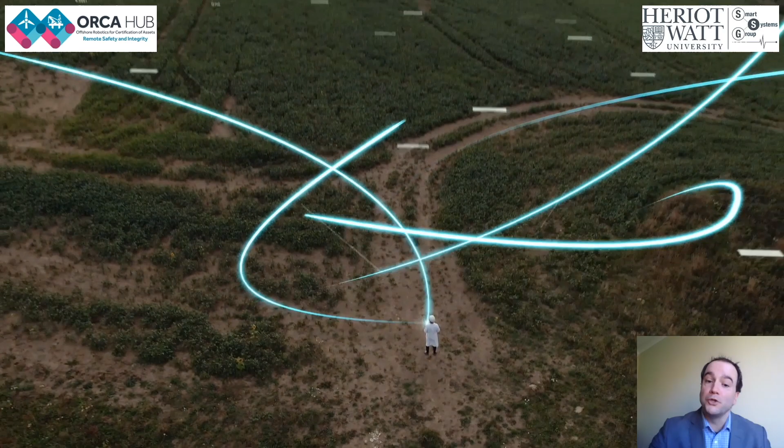So the offshore environment is where our focus has been in the ORCA project. This is a very dynamic and complex environment where there is a lot of legacy infrastructure, as well as increasingly expanding offshore renewable infrastructure. At the same time, as we go through this unprecedented growth, we have an opportunity to capitalize on the unprecedented levels of connectivity we have through cyber physical networks.

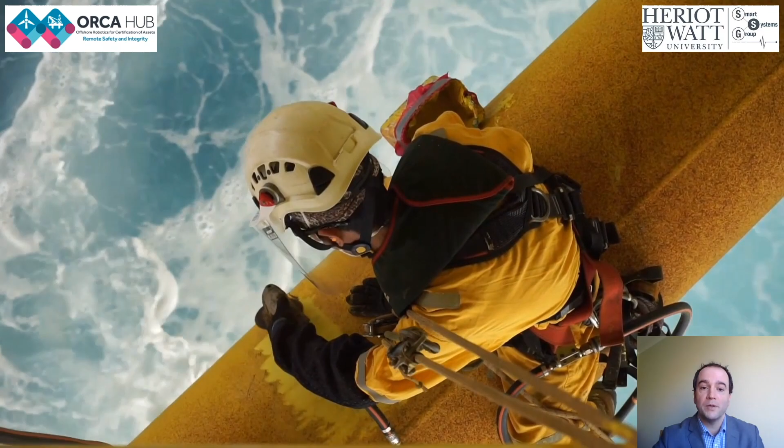Now, the life cycle management of our critical energy infrastructure is key. And because we can now engage from generation, distribution to point of use, as you're seeing here, at global scales like never before, we have some amazing tools and technologies at our disposal that can help us deliver sustainability and make human operations in these environments safer and more rewarding.

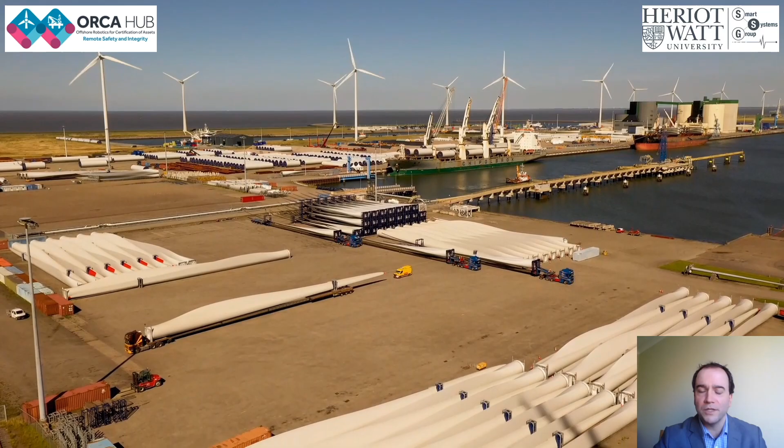The points of intervention that we focus on are predominantly in the operation and maintenance space. However, without a doubt, there are points for robotic and AI solutions at all points of the life cycle of these critical and remotely located infrastructure. So...

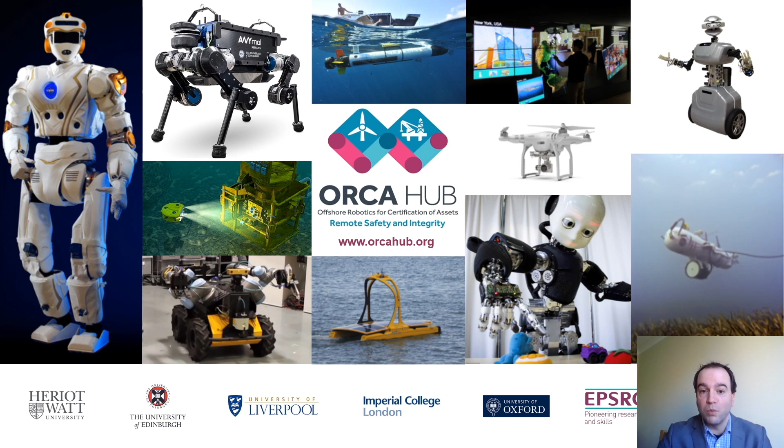So today I want to give you an insight to some of the collaborative work we've been doing across the university partners of Heriot-Watt, University of Edinburgh, University of Liverpool, Imperial College London and Oxford, along with around 45 industrial partners and stakeholders through the Orca Hub.

The Orca Hub is the world's largest robotics and AI research hub solely focused on offshore asset integrity. The vision of the hub is to support long-term offshore industry vision of a semi-autonomous energy field, operated, inspected and maintained from shore. So our mission is to drive this creative science and engineering into next generation products and solutions, and to support the UK supply chain in becoming one of the most productive in the world.

Within Orca, we have 4 work packages, or research themes, you could define them as. When we created these themes, it was after workshops with industry to understand the key capability statements they wanted us to achieve for their industry.

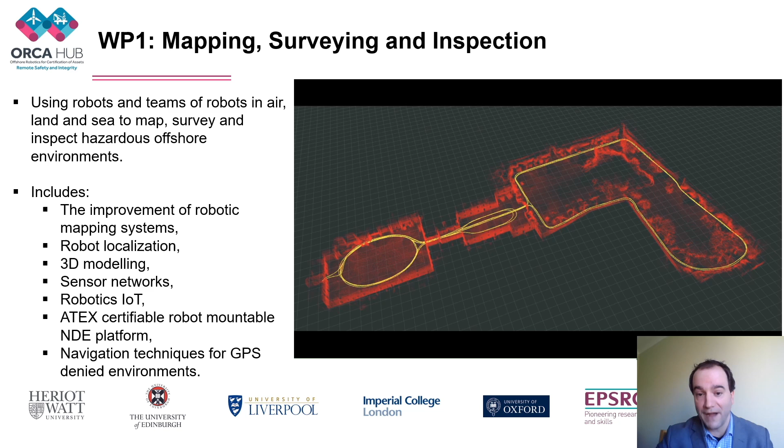Mapping, surveying and inspection, of course, having an accurate and computationally efficient picture of the world around us is clearly key to safe and productive interaction with it. This is just one example from our teams, and we are looking at land, sea and air robotics, looking to improve mapping systems and localization, very important when we consider the dynamics of the environment in terms of visibility, etc., and how we build up these robust and accurate maps of the environment using different multimodal technologies.

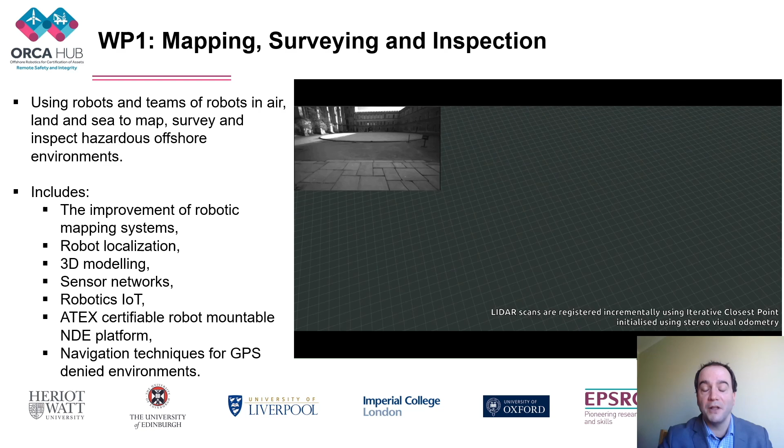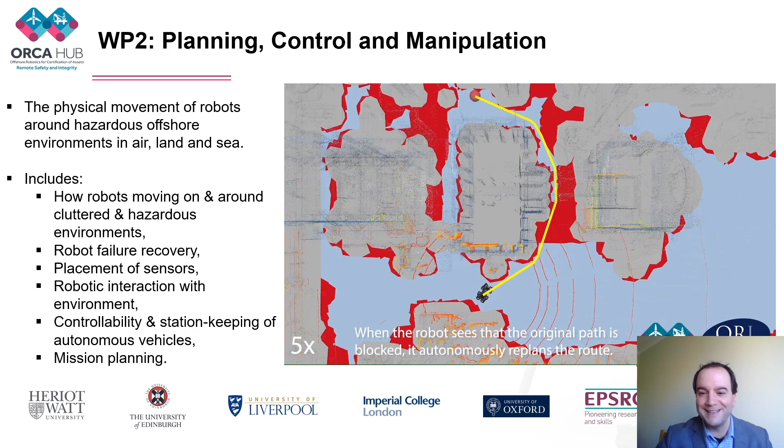Another example, in this instance from planning, control and manipulation, our second work package, concerned with the physical movements of robots in these high consequence and intrinsically complex environments, very cluttered spaces not being designed with robot accessibility in mind. In this instance, what you're seeing is the adaptive planning and control required to both mitigate the risk and take an alternative route, then overcome obstacles encountered on that new pathway.

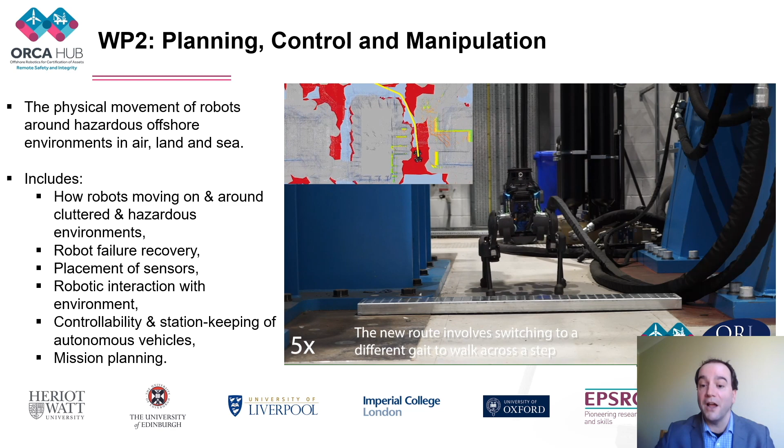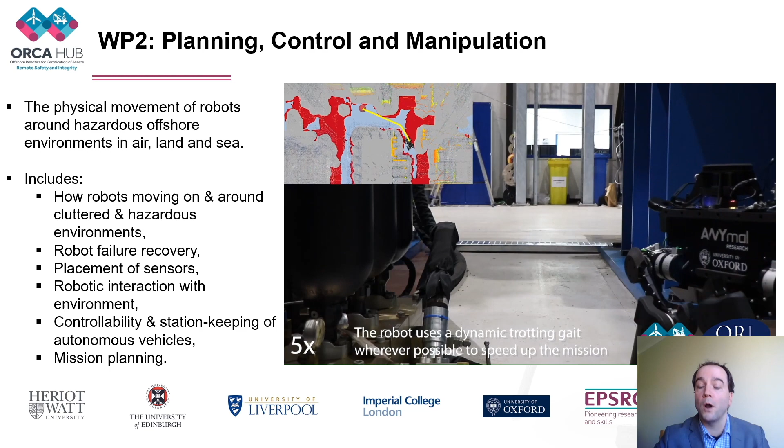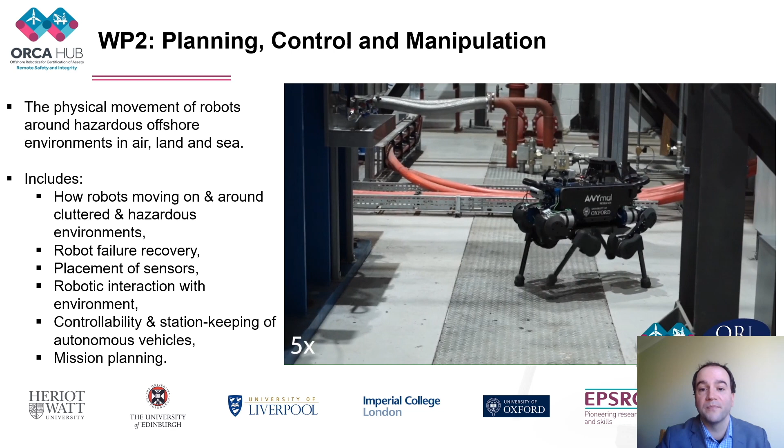Robot interaction with the environment is obviously incredibly important for inspection, but clearly also for manipulation tasks. This could be to add a stimulus to test a structure, or indeed to conduct a repair function. As we can see here, ANYmal has located the asset of interest, and it can then conduct the inspection with the payload, in this instance a thermal camera.

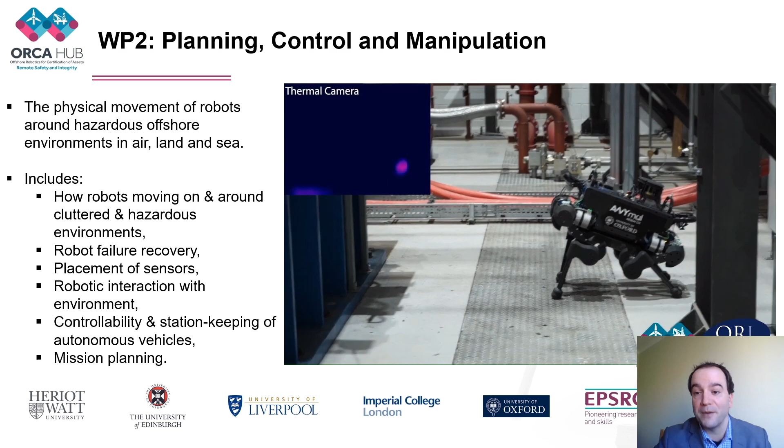Our third work package was looking at how we couple and optimize human collaboration with multi-robot teams. This was intelligent human-robot interaction with explainable AI. Playing in the background here is the Miriam platform, which can use text and speech to engage and query, in this instance, a fleet of 8 autonomous underwater vehicles. This gives us actionable information for the human in the loop, and the explainability of asking the team of AUVs, as well as individual systems, critical requests such as: what is your state of health?

Why is there a time delay on your arrival at the agreed waypoint? It promotes this translation, engaging and coupling in a kind of symbiotic fashion between the remote human in the loop and the deployed field robotic systems. Obviously this would need to be tailored for a range of end users, from technicians to asset directors, because how we engage, the symbolism and the priorities we apply, will vary for the individuals.

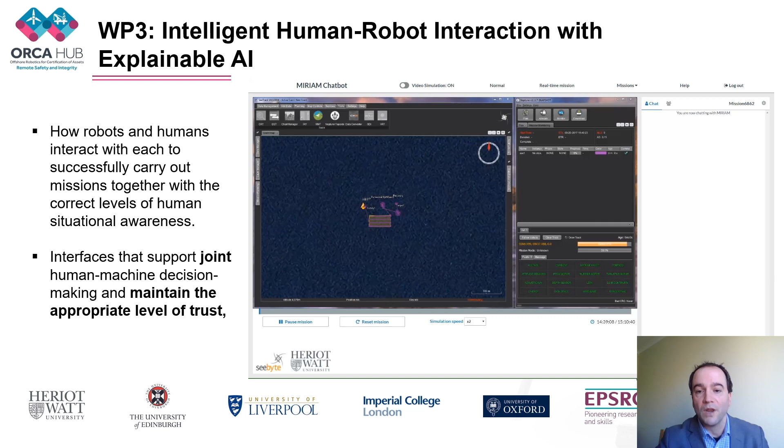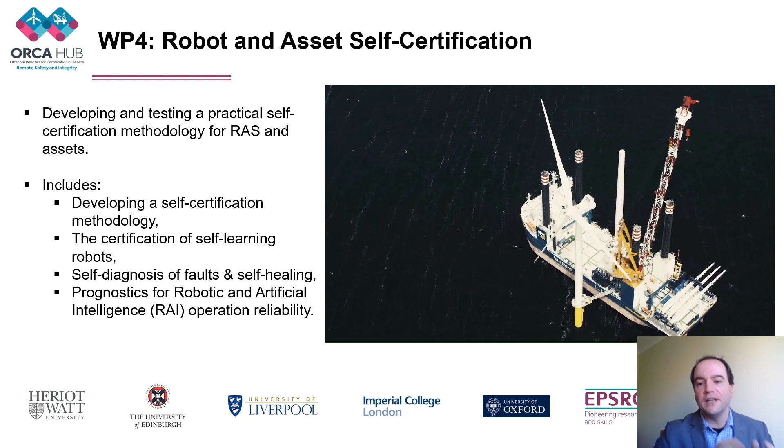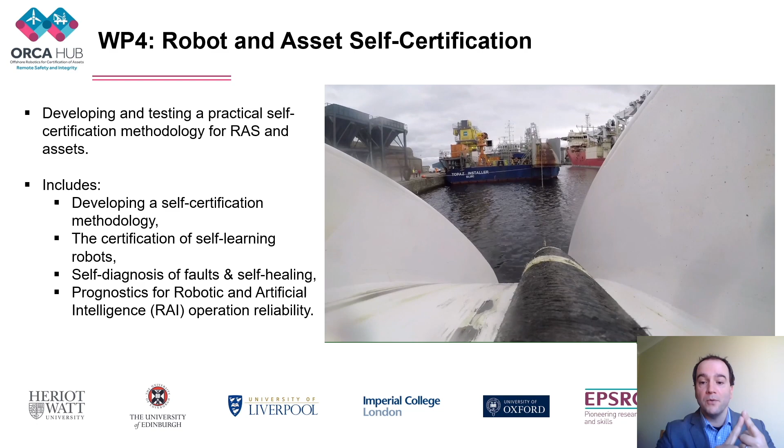Our fourth work package was focused on robot and asset certification. To explain what that means, the laptops you're using just now, your mobile phones, they all have certification that says they're legal to be used. That legal definition has been based on safety and quality compliance. Now, given that robots can have different levels of autonomy, so devolved responsibility, interacting with people, other robotic systems, infrastructure and the environment, we felt a new standard was required.

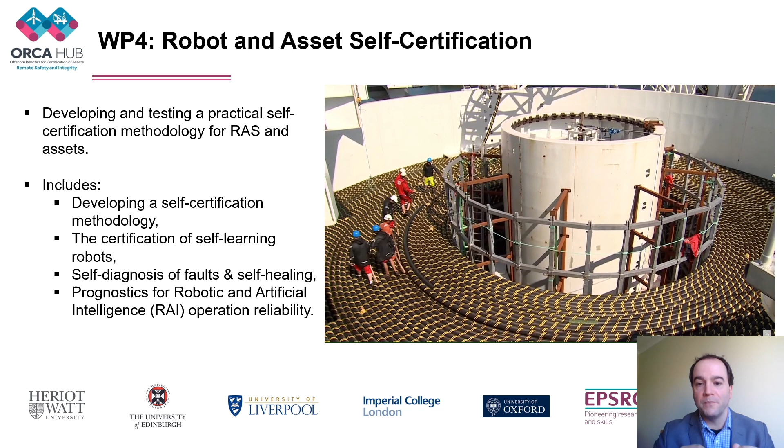And we called this standard self-certification. How could we get runtime diagnostics and prognostics that reaffirmed the robotic platform was still in a safe state of health in order to fulfill its mission? So we developed concepts such as reliability ontologies and edge prognostics, to give us a proper, more informed understanding of the state of health and remaining useful life of these field robotic systems.

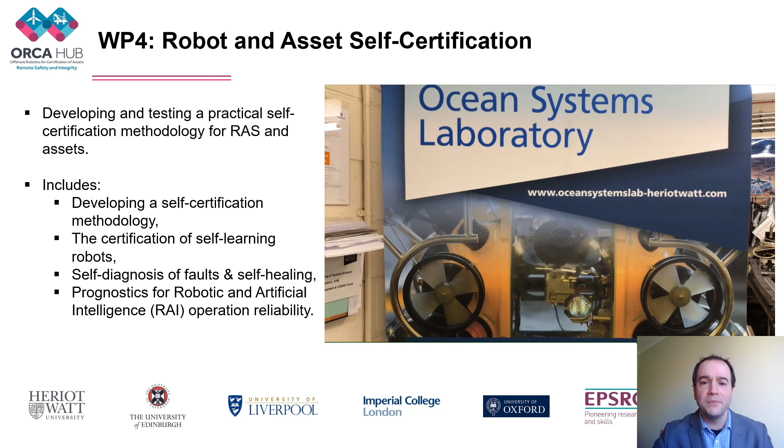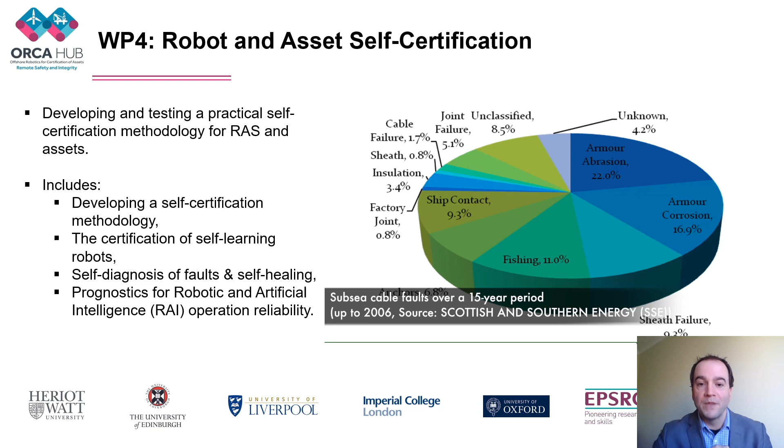Now, we took the principles of that process, that methodology, and also applied it to subsea power cables, because we had discovered, by looking at 15-plus years of historical logs from one of the UK's largest subsea cable asset owners, that 70% of the failure modes of these cables were not being monitored. These failure modes were associated with ambient factors - basically abrasion, corrosion, and third-party impact. And those mechanisms of failure were not being detected by the current state of the art of online partial discharge monitoring, which is predominantly looking at electrical condition monitoring.

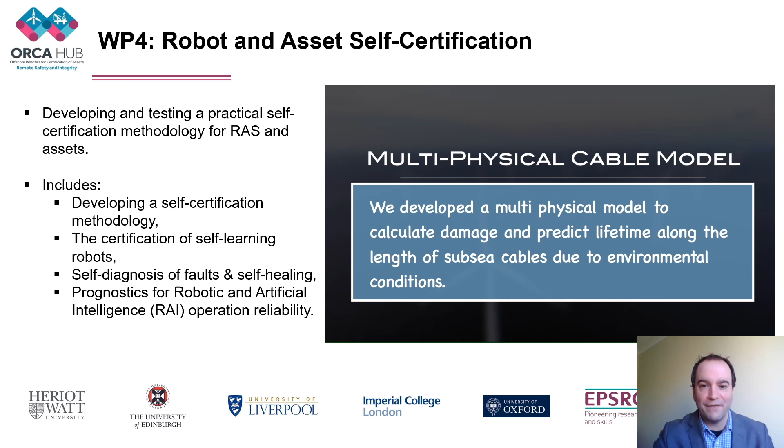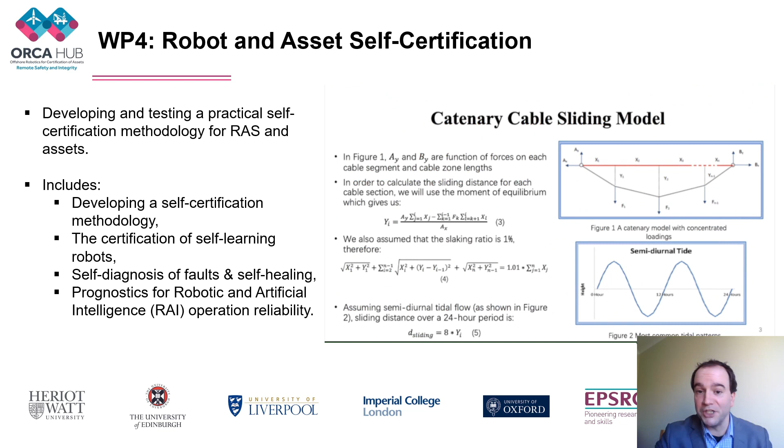And given the amount of legacy cables we have out there, the likes of fiber optic technologies was obviously not an option. So what we created was a low frequency wideband sonar, taking inspiration from the likes of dolphin sonar. This would give us an integrity image of the subsea cable structure.

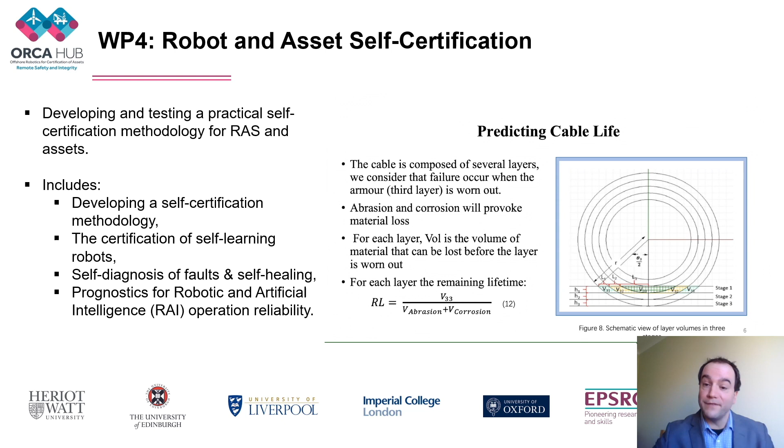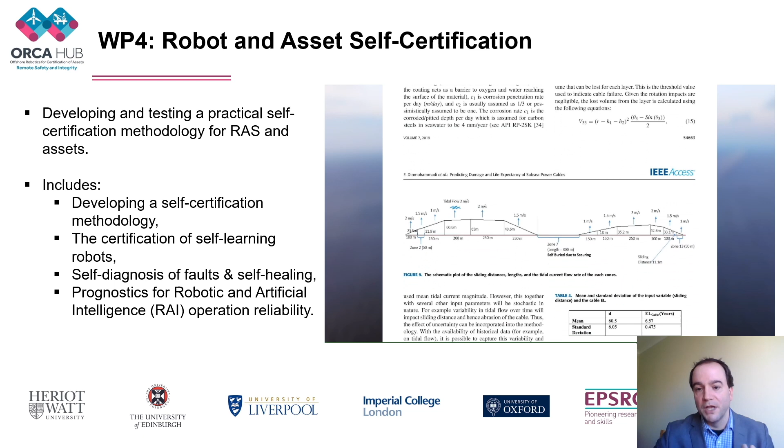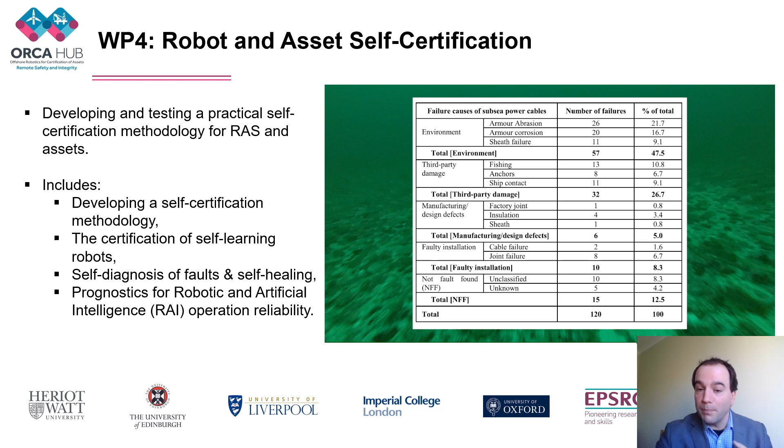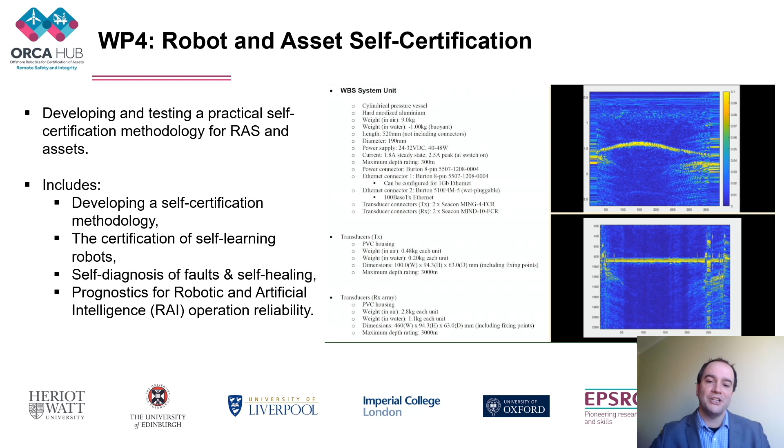Now, to create a really informed and verifiable model, we took sources of data and information from multiple sources, and we created what we call fusion prognostics. So we took historical offline data, in situ seabed topography information, cable manufacturer information. We were then coupling this with some experimental life cycle testing data to understand how these structures may degrade for different cable types over time, and we were able to integrate this to give us, as you've seen briefly, an acoustics and color kind of image.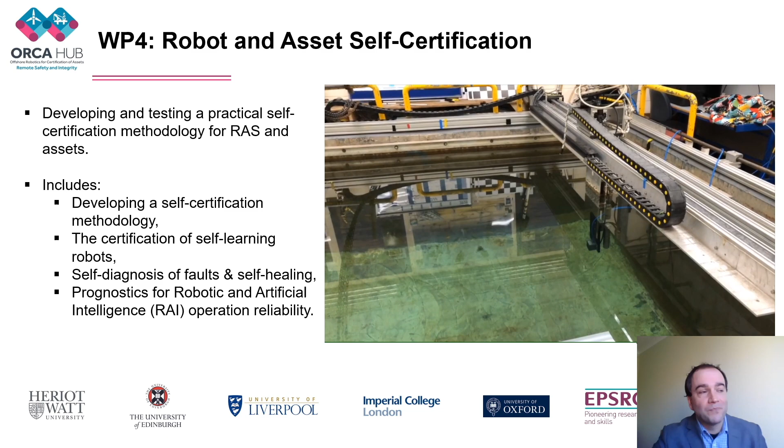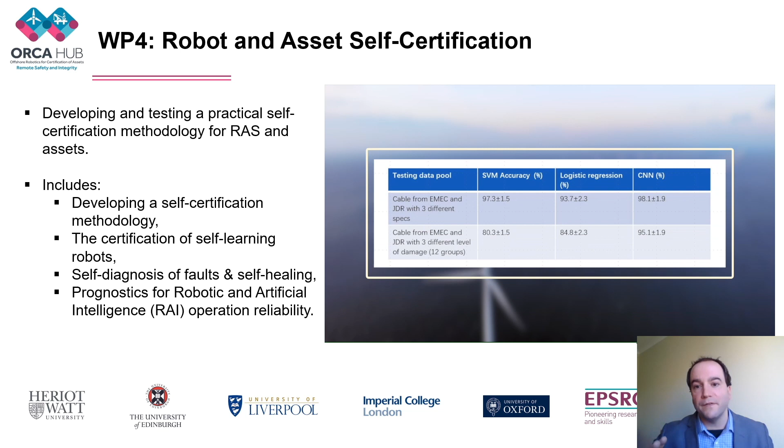The end result of this work was that we were able to forecast the failure of cables within plus or minus 1 to 2 months of their lifespan. And their lifespan, for some installations, was about 50 years. For other installations, you could be looking as short as 2 to 3 years in highly dynamic environments. But more typically, you're looking at 15 to 20 years.

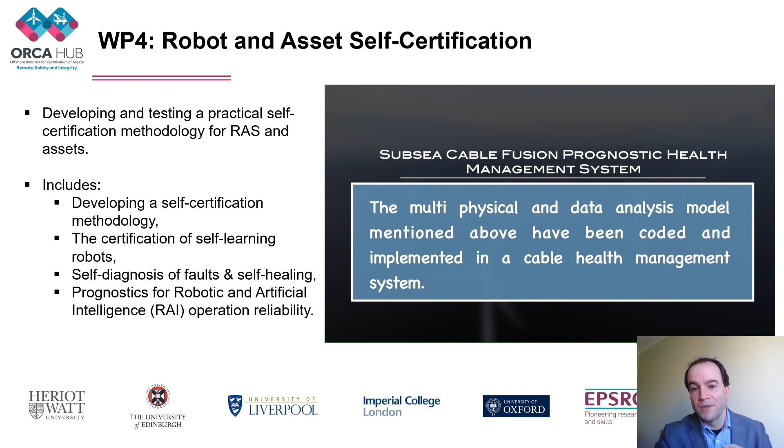Now, that level of accuracy was actually excellent because to operate offshore, you need to mobilize your logistics and your materials about a year in advance in order to reduce your operation and maintenance costs. Okay, so I want to move on now to...

Looking at, so what does the future look like? We've done a lot of short mission case study work in this area, and building on that point I was expressing to you about cyber physical systems, I believe we now have a lot of the enabling technologies to look at more sustainable operations in order to improve life cycle asset management in the offshore space.

And before I give you an insight to our most recent work, I felt it was really interesting to highlight this slide on managing expectations and delivering value when we think of autonomy and autonomy as a service. So Toyota, fantastic company, great resources, great technology.

There was an incident at the Paralympics. It transpired it was human error, but it did cause a disruption to the use of the e-Palette system.

If we then take an example of Amazon, they are struggling to deliver through years and years of investment into their drone delivery system. Again, great company, fantastic resources, great technology, but they're struggling to deliver this service.

Also, Tesla, a household name, their successes and failures in their automotive autonomy is well documented in the media, with a range of factors associated with it, from intrinsic system failures to human failures in terms of misunderstanding of the responsibilities or neglect of responsibilities.

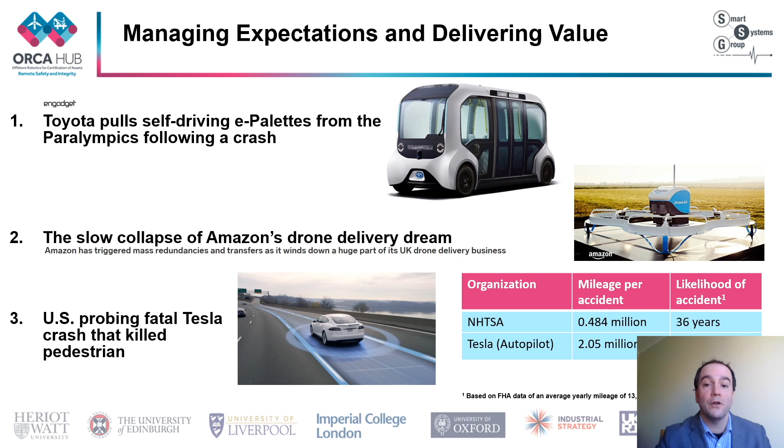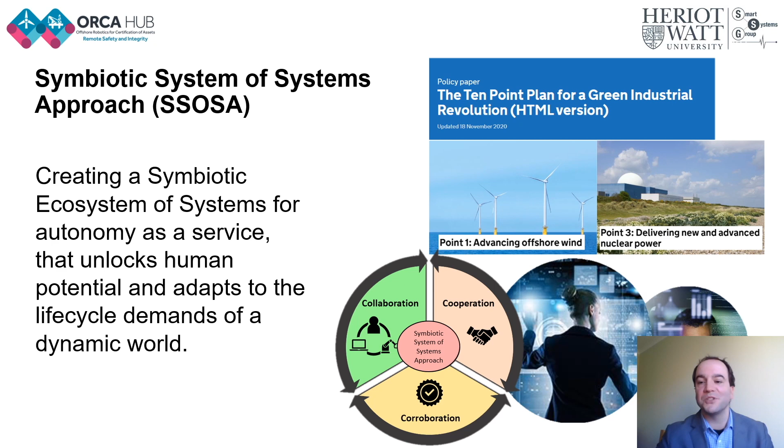So this has driven my group's thinking on a symbiotic system of systems approach. How can we create collaboration, cooperation and corroboration across the environment, the autonomous systems, the human in the loop and the infrastructure? So to achieve that, we need a cyber physical network that allows the leveraging of the benefits and the attributes of each of these systems to co-inform and advance each other.

So a kind of schematic of what this looks like moving forward. We have created what is called a symbiotic digital ecosystem. We can currently, in our labs, incorporate around 1,000 different devices and autonomous platforms into one digital commons and coordinate them with a human in the loop.

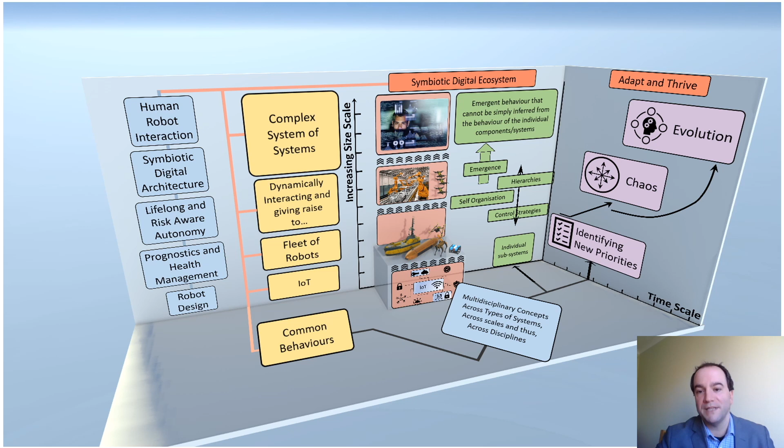Looking into the future on the right-hand side, where I've labeled it Adapt and Thrive, I believe this increased connectivity will allow us not only to be robust to disruption, but actually explore adapt and thrive opportunities. For example, if we see supply chain constraints on composite material availability, we know to instigate an appropriate response in asset life extension to mitigate some of the risks that may create.

So today, to prove some of our principles of this, we have run some experiments in constrained environments, and the deployed technologies look like this.

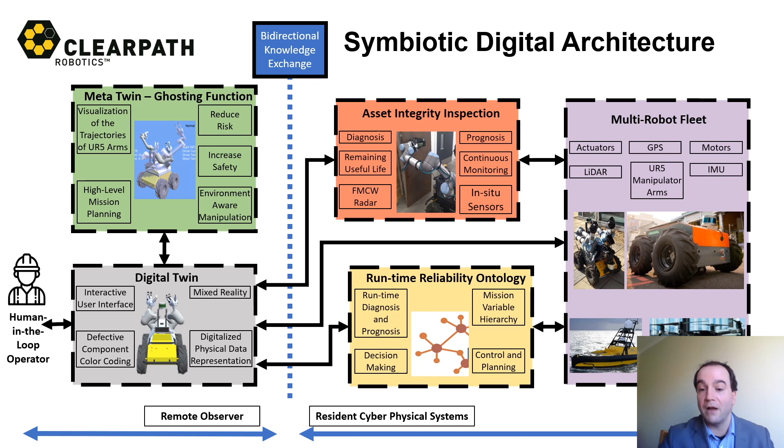I will now show you a wee video of one of those experiments that we've been running.

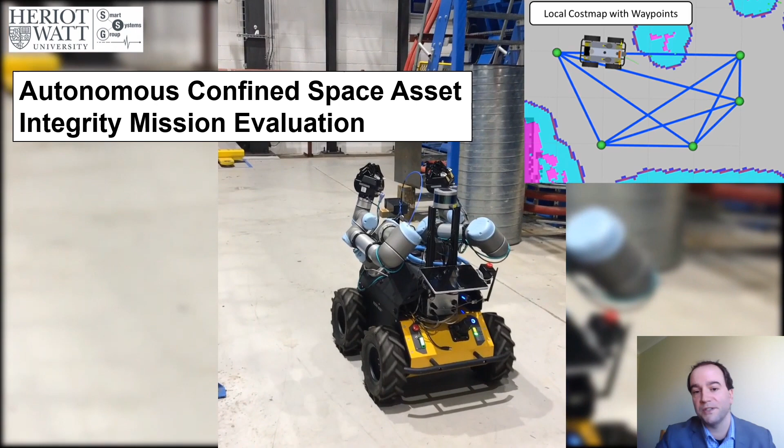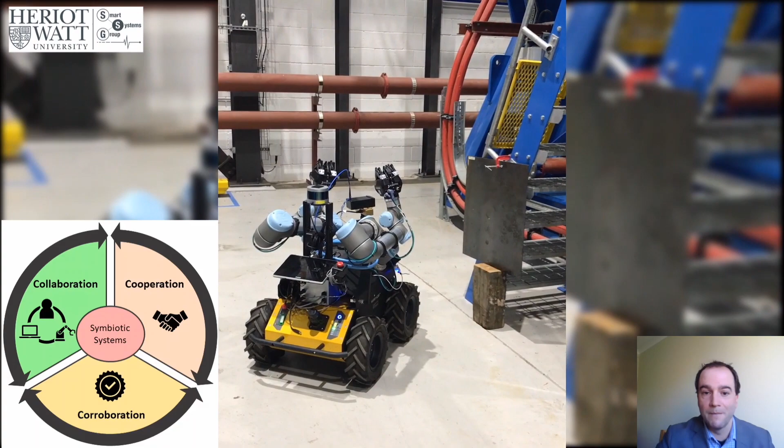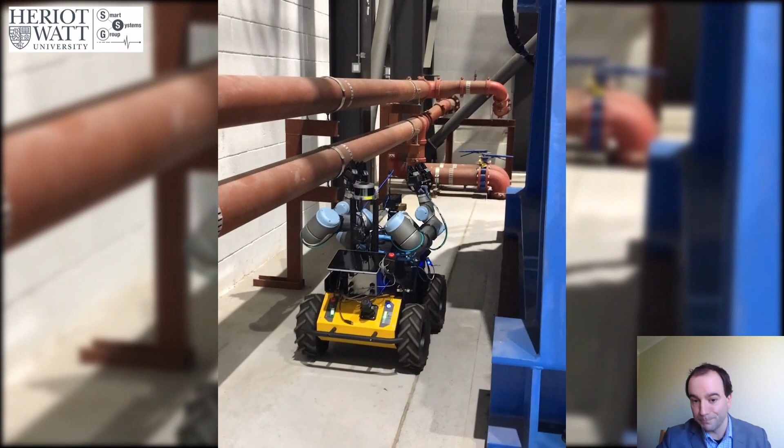In this experiment, we have a resident Husky system instrumented with radar technology for doing asset inspection, and it also has arms you can see on it for manipulation tasks. This mission was in an industrial facility, a confined environment where humans are not permitted when certain systems are in operation. Now, whilst the robot goes through different stages of its mission, it engages different subsystems.

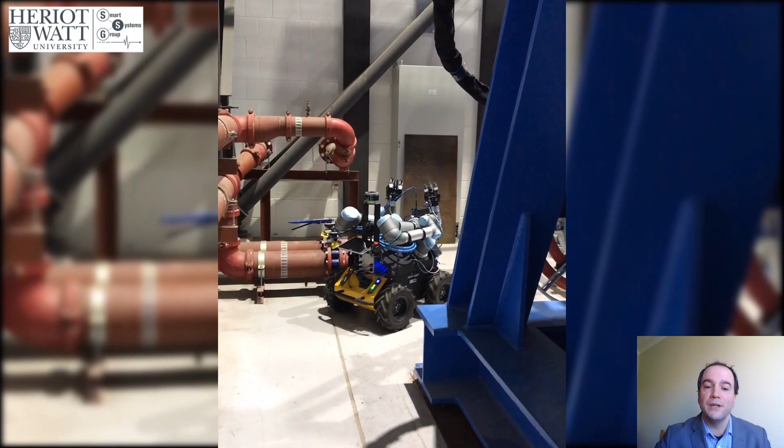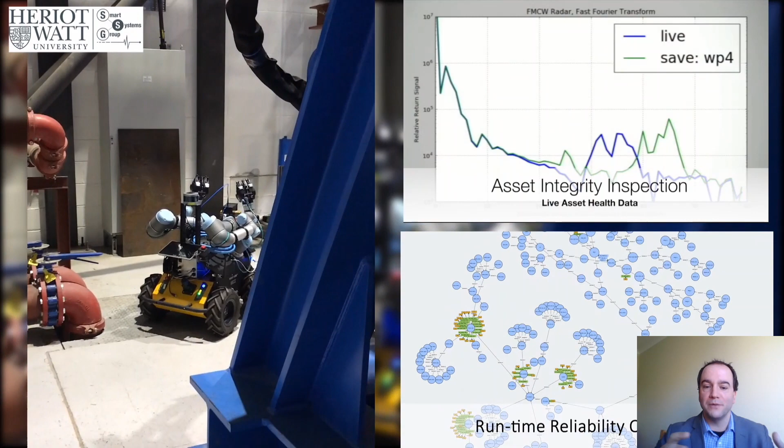And this is where our reliability ontology comes into play. So you're about to see a daisy chain type graphic emerge, mapping the interdependencies and relationships across the subsystems within the robot. This is what helps to inform our in situ self-certification and understanding of the system's reliability.

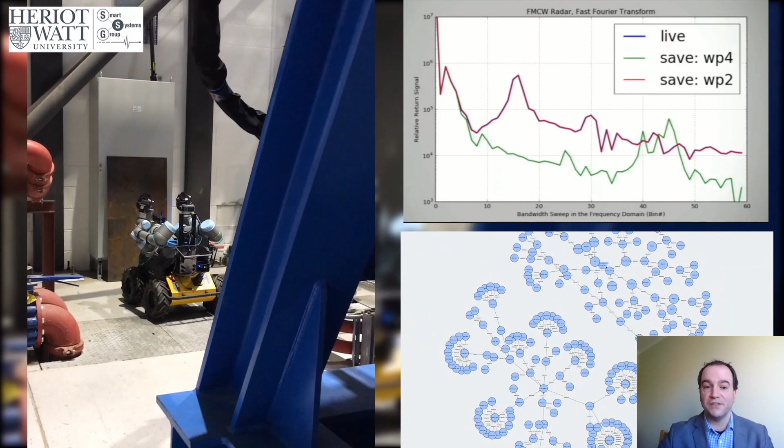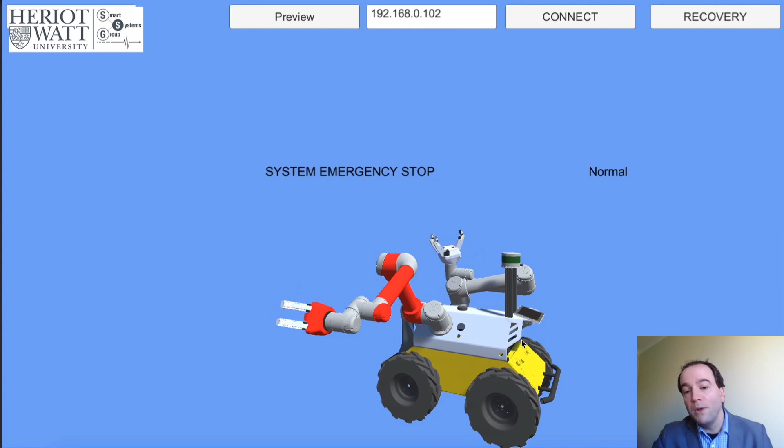The data, which is very unique in this instance - it's a new radar technology we've patented called FMCW - is fed back to the end user to incorporate into other offline information. We have a fully synchronized real-time digital twin of the resident system to allow us to query, challenge, and verify some of the information that's coming back to us.

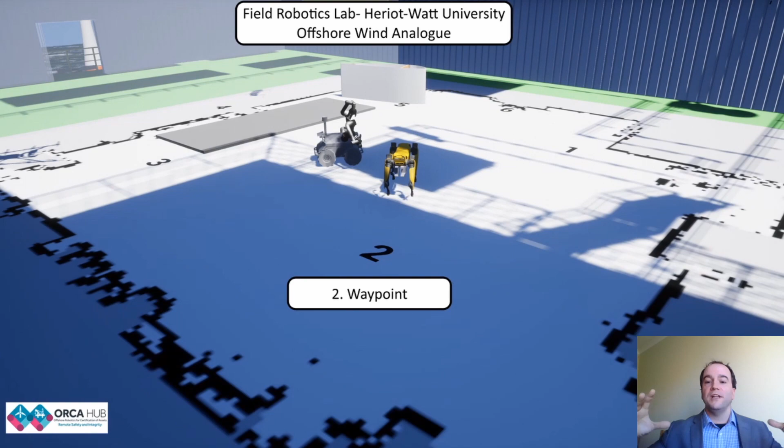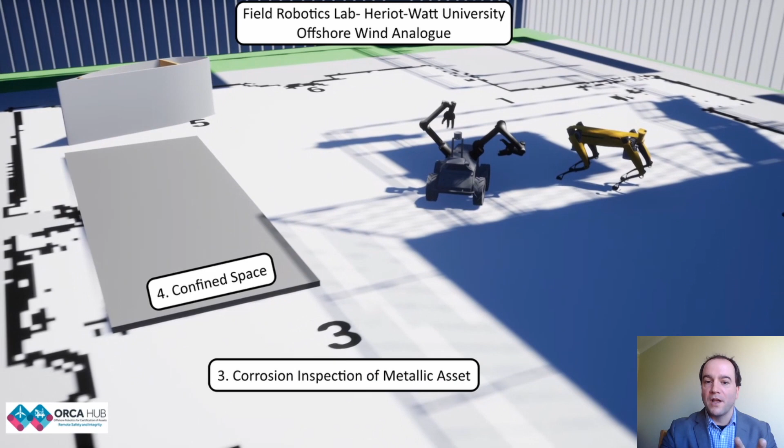So in the future, and in our ongoing research which will end at the end of March, we are creating a physical representation of the offshore environment in our labs, using the lab environment to create a dynamic space so that we can change the safety case. We can create obstacles. We can explore the resilience of a cyber-physical network of a multi-robot fleet working with a human in the loop. The reason we're doing this is that the barriers we see to adoption relate to resilience, safety compliance, and reliability.

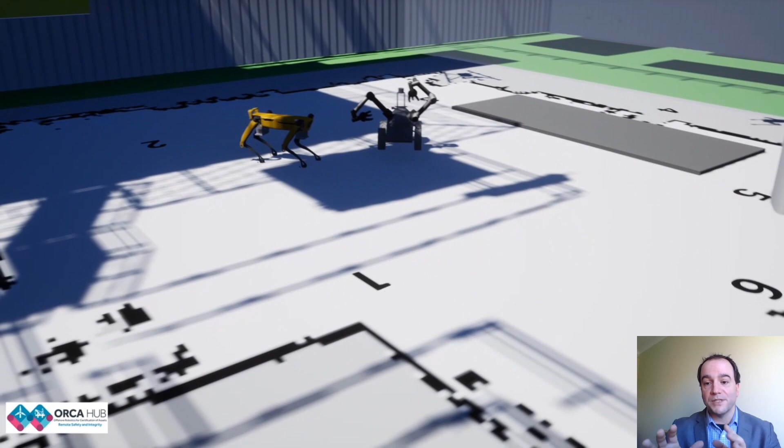So one of the biggest enablers for autonomy as a service is having a cyber-physical architecture that allows us to tune to the application with different multi-robot systems and address those key barriers in a timely fashion.

Some closing points here in terms of sustainable energy and robots. We need to carefully manage the tension of offshore infrastructure and lifecycle management in the environment. We cannot just use green technologies; we have to reconsider our practices and the legacy implications of these practices. Systems thinking within a real-world context is vital.

A lot of research in robotics uses customized off-the-shelf technology. This has been good for early sprints and quick learning. However, sustainable solutions require more systems thinking, capturing the real-world complexities.

I do foresee a future for my team's symbiotic system-of-systems approach as a means to unlocking human potential with scalable autonomous assistance. And finally, looking at the global scale, and the fact that we are looking to a global response in regards to climate change, I can see networks of cyber-physical cooperatives being integral to how we put the world onto a pathway of sustainability and prosperity with respect to our vital energy services.